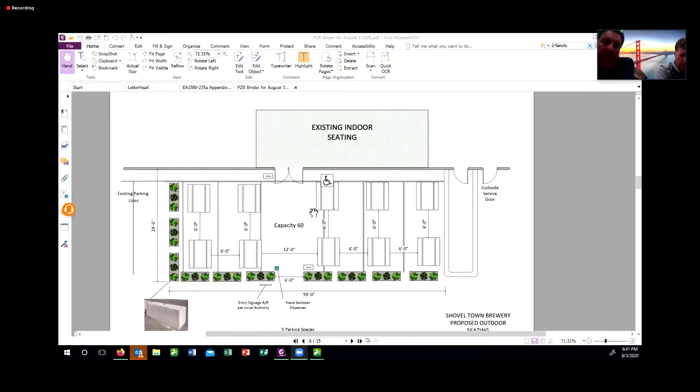Okay, so this is the designated seating area right here. Actually, it's the green - if you scroll - the green, that's right, I'm sorry. Yep, it's the green area here.

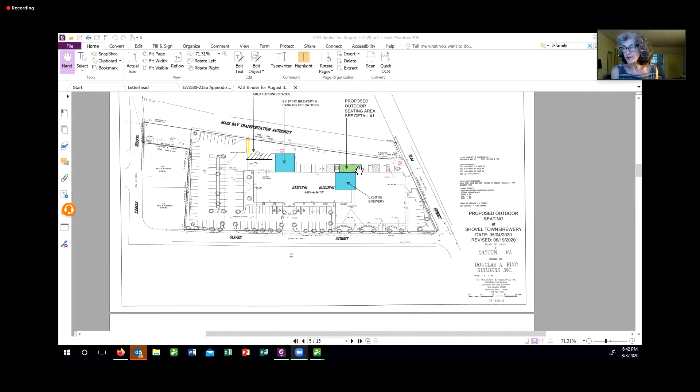There are 5 parking spaces that were taken over to convert to the outdoor dining, and they're proposing adding 5 parking spaces right here to compensate for those. Which have already been added. Yeah, they're already there, lined with yellow lines.

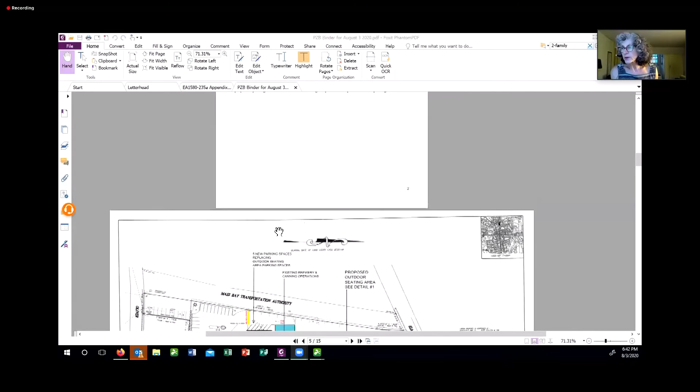Okay. And the requirement is one parking space per 4 seats. So that would be a requirement of 22 parking spaces in total. They have that number of parking spaces in this area. And then there are 144 parking spaces in total throughout the complex.

And a lot of these businesses really are 9 to 5, or 9 to 6 or 7. I believe there's a yoga studio that operates. ECAT's operation is in the building, and those may run a few extra hours, but the number of patrons are probably pretty small.

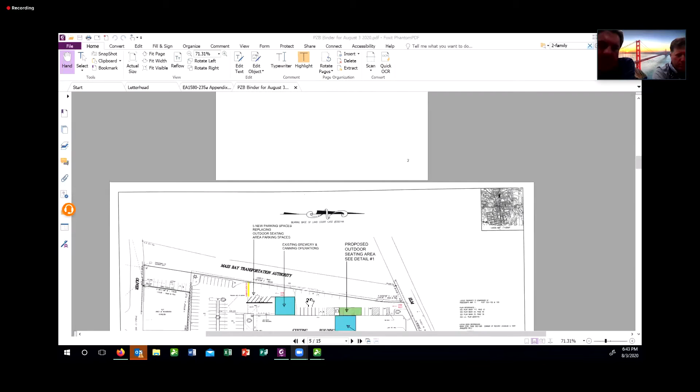Just a comment - even with the 64 seats that we had before, the way we ran the business, we really haven't had any parking issues in the area. As Stephanie said, most of our peak hours are when the other businesses aren't there. There are plenty of spaces that aren't utilized during that time. And our patrons have learned to park in and around the existing spots without detriment to the other users.

Okay, so Stephanie, I'm curious, just in terms of the septic capacity - because obviously it's not in our jurisdiction, but in terms of enforcing it or keeping an eye on it. And while I hear what the guys are saying, I'm just thinking in the future when COVID - if we ever get away from COVID - and you have 60 seats outside and you have full capacity in and out, that would fall on the Board of Health to enforce.

Correct, or to work. So we could, I guess, in a decision, just note that. I don't think it keeps us from issuing a site plan approval if that was the board's desire. Right, because we don't have the power - the existing space already exists, and I don't think we want to get into writing a decision that limits. Okay, well, if you can only have 64 total throughout - we're approving 60 outside and the existing inside. So I think the technicality of the enforcement of capacity would fall to the Board of Health. Question mark, right?

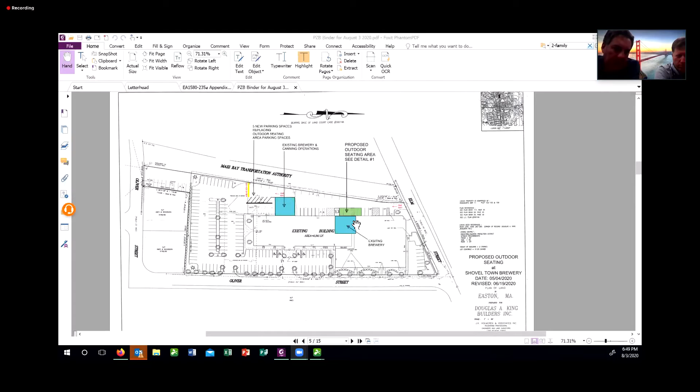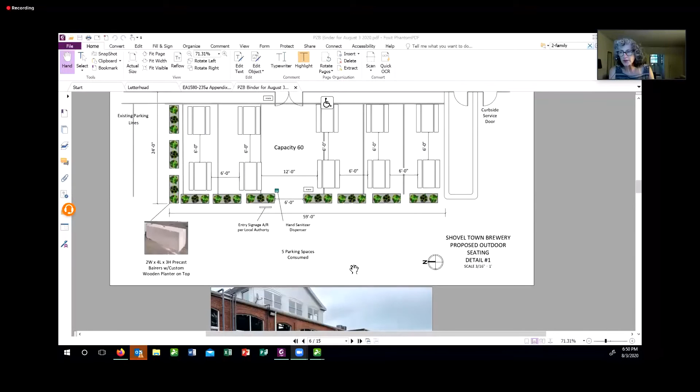Okay, if you just scroll down a little more, Stephanie. I don't remember the numbers off, yeah, it goes out 24 feet. That's correct, and it's about 60 feet wide. Okay, I just wanted to make sure that it didn't extend beyond the parking spaces area, just because the roadway is constricted. We probably should have shown this, this is an actual photo. Yeah, that's the one that's out there now, correct? Right. Okay, thank you, sorry.

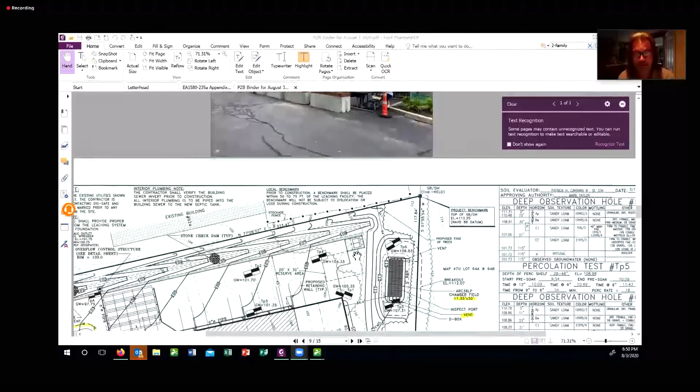Thank you, gentlemen, good luck. Thank you guys, safe flight back from San Francisco. Yeah, thank you. All right, good night. Good night. All right.

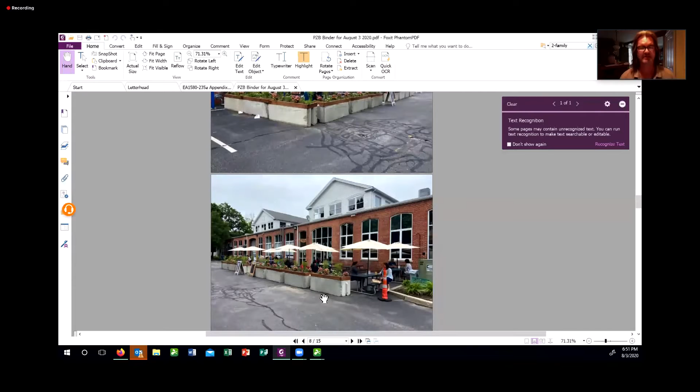Next up is also, I guess, a minor modification. Let me try that again. Minor modification of a site plan, or acceptance of a revised plan, for 924 Washington Street. A site plan revision. Stephanie, would you like to? I'm sorry, this is for acceptance of a minor modification of the plan for 924 Washington Street.

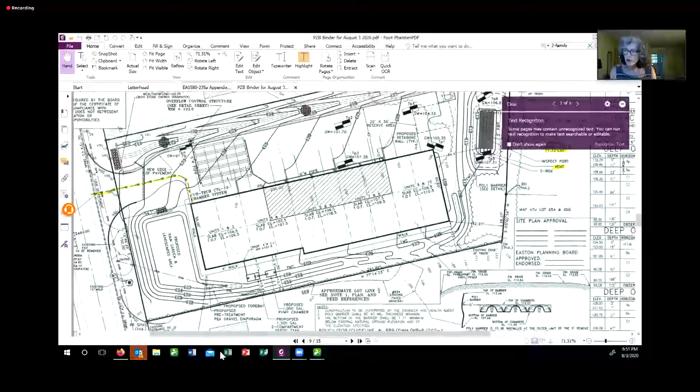This was the contractor's bays that was approved by the board a while back. You may recall, this is the one with another building over here, and the board asked that they consult with the fire department to make sure there was plenty of room on the southern side to get out to the building over there. Really, the only changes that were made were in response to the Board of Health.

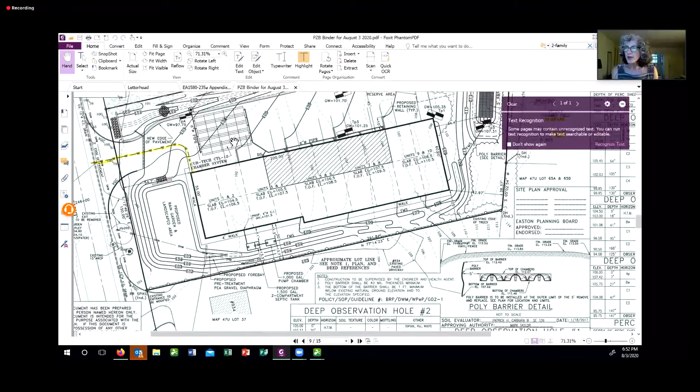They did not have the book and page for the deed on the plan, and they needed to show the dimensions for the leaching area. And then they had a baffle off a T that was shown in the wrong direction or off the wrong T, so they made those corrections.

They asked if they needed to submit it as a minor modification. It seemed like a very, very small change, and my suggestion was they asked the board to accept the revised plan into the record. We did have in our files the final plan that was approved for construction. Seems pretty straightforward. Questions, comments, anybody on the board?

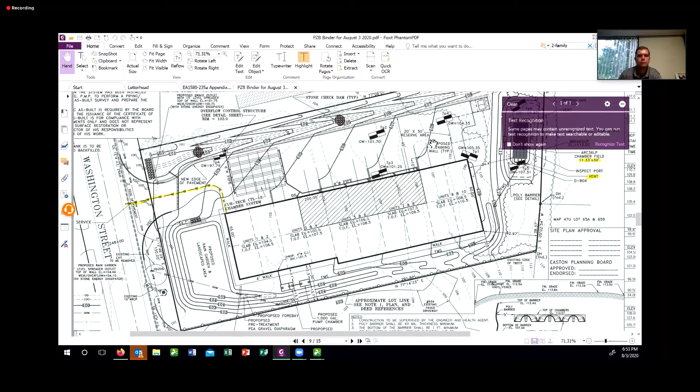So should we just do a motion for this? I mean, is this technically a modification of a site plan? Is that how we're handling this? No, it's an acceptance of a minorly revised plan into the record. Okay, we have that in our bylaw.

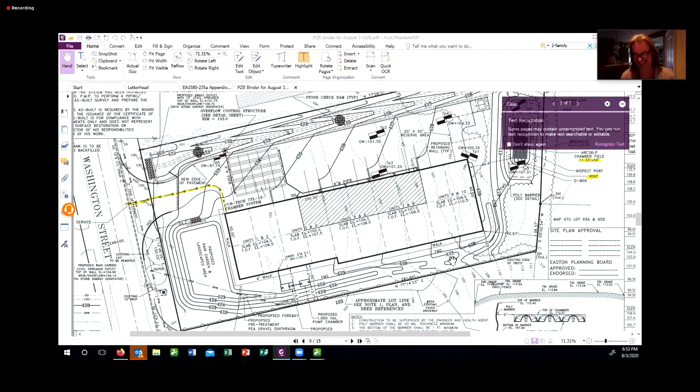A motion to accept the minorly revised plan into our record. Second.

Any further discussion? No one's chiming in online. Bob is muted all of a sudden for some reason. Nope. No, I try to mute when the girls are screaming in the background. Oh, sorry. Fan club?

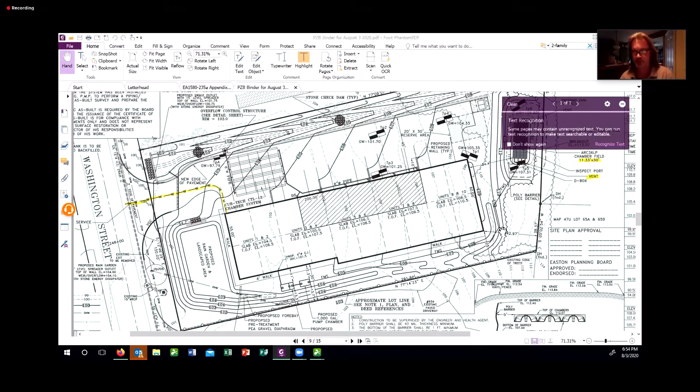All right, although we have a second, any further discussion? Not hearing any. All those in favor: Strange, aye. Kane, aye. Anderson, aye. Stetson, aye. Alstaric, aye. All right, let's see, 6:54.

Meeting minutes. Why don't we do that next? Anybody have any? Oh, look at that, we have them online, I'm on the screen.

Are you reading them online right now, Greg? Well, I already read them, I was just looking at something. The word strange popped out, so it catches my eye. Did anybody have any revisions or typos or anything they needed to point out?

So at any point someone wants to make a motion, feel free. I'll make a motion to approve the meeting minutes from July 20th. Second.

Any further discussion? Hearing none. All those in favor: Strange, aye. Kane, aye. Anderson, aye. Stetson, aye. I'll abstain. Okay, all right.

2021 update: subdivision rules and regulations. Greg, you and I talked about this a little bit. The board has been talking about it for a couple of years. I think it was 2017 when the board updated its rules and regulations, and this has been on the back burner for a while. So I thought, and I think you said, that this should be the project for the board this year.

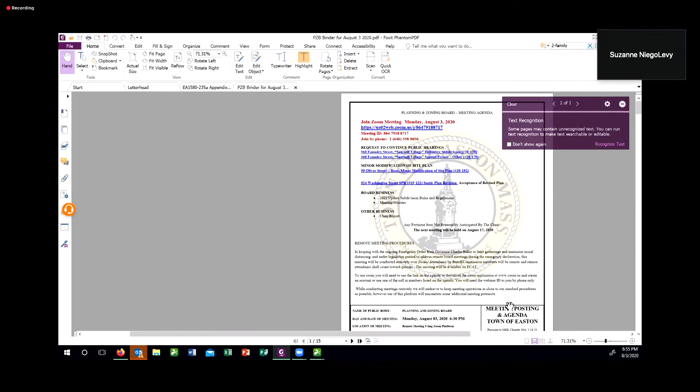Yes, I had pitched it to Imai, but then he gave us notice, so I guess he didn't want to do it. Well, yeah, I think for a few years—both our bylaw, we recodified the zoning bylaw a few years ago, but now at some point, I know this, you didn't talk about, but we need to.

And I think at the same time, along with our rules and regs, it's time for us to maybe look at doing things a bit more graphically too. Apple—why did everybody love a Mac? It was the graphic user interface. And still to this day, I get questions from building officials, developers, and homeowners trying to explain the height bylaw that we wrote a few years back, for example. So I think if we could, make it a more user-friendly document.

And that ties into something I wanted to bring up quickly on my chair's report. When we have design review as part of special permits—that made me think, when Deb, maybe two meetings back, said something like we were reviewing someone's plan.

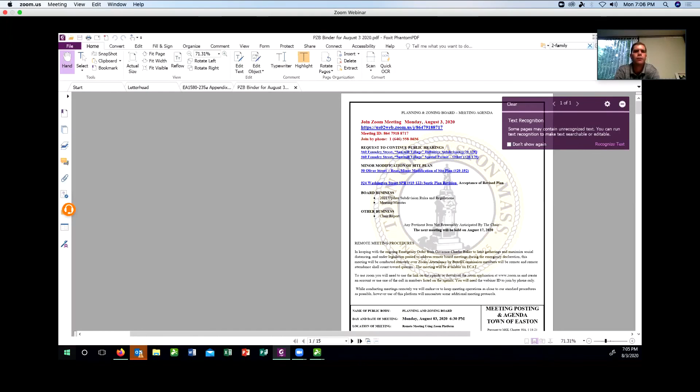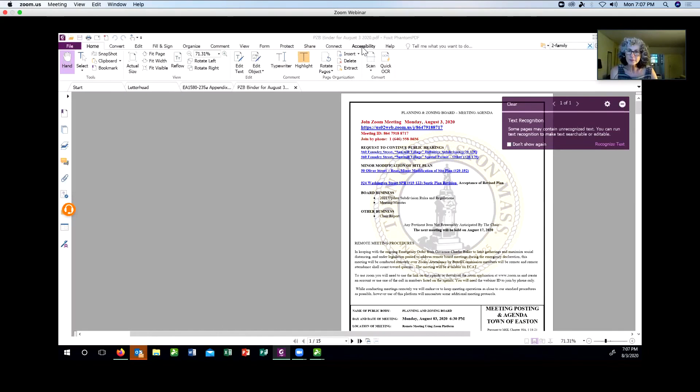Motion to adjourn. Is there a second? I heard one. All those in favor? Aye. Shane, aye. Anderson, aye. That's an aye. All in favor, Sarah, aye. Well, thank you all — Suzanne, thank you. Stephanie, thank you. Easton, good night everybody, stay safe, stay cool. We'll see you guys in a couple weeks. Good night, have a good night.